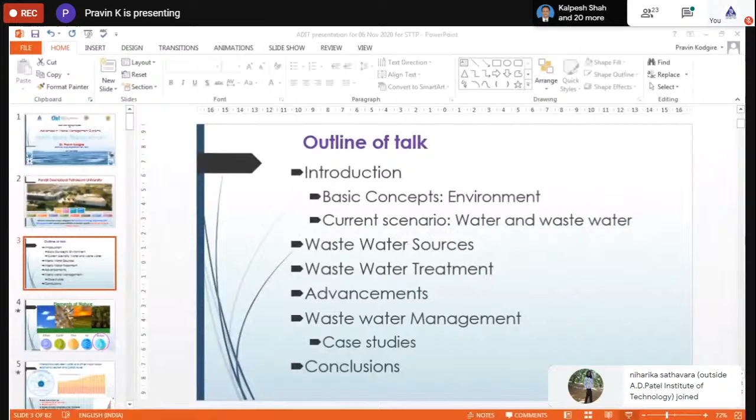Sorry to interrupt, sir, but your slide is not changing again. It's stuck on the outline of the talk. Okay, so let me put... Yes, now it's visible. I think I'll not put the full screen, I'll put it in this mode, because there is some problem. Or let me unshare and share it again. No issue, sir, it's fine, it's visible now. Okay.

So I was discussing the very beautiful nature and its five basic elements which we pursue through the scriptures: Akash, Vayu, Agni, Jal, and Prithvi. We are very familiar with these, and today we are going to discuss water and its importance through wastewater management. Why is wastewater management important today? Since childhood and ancient times we have known that water is a very important ingredient, and many habitats are situated where water bodies are available.

So let me take you to another perspective: water has a very strong interaction with human beings, human settlements, the ecosystem, and agriculture, producing food for human beings and animals, and producing energy. They are all interlinked, as you can see in the one circle where all these things are interrelated and all associated with water.

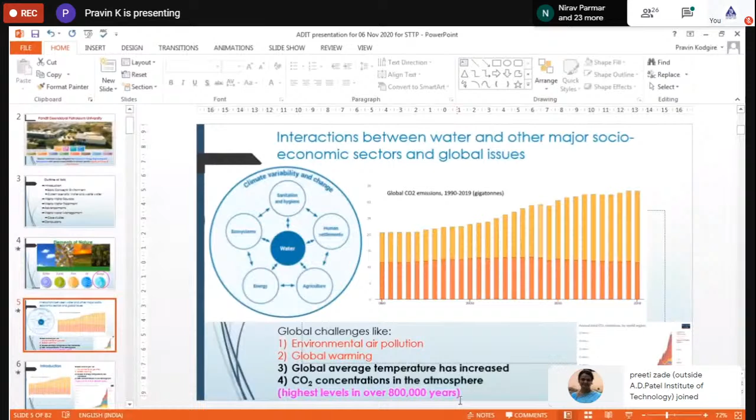This particular slide talks about global issues and problems, and how water is directly and indirectly related to some of these points. Before the pandemic, the CO2 level was the highest in 8 lakh years, almost about 420 ppm in the atmosphere, which is a consequence of environmental pollution and, to an extent, water pollution as well. Although water pollution in a different sense is our basic focus, global warming, the average rise in temperature, and CO2 concentration are certain challenges with which water is equally associated and going to get affected.

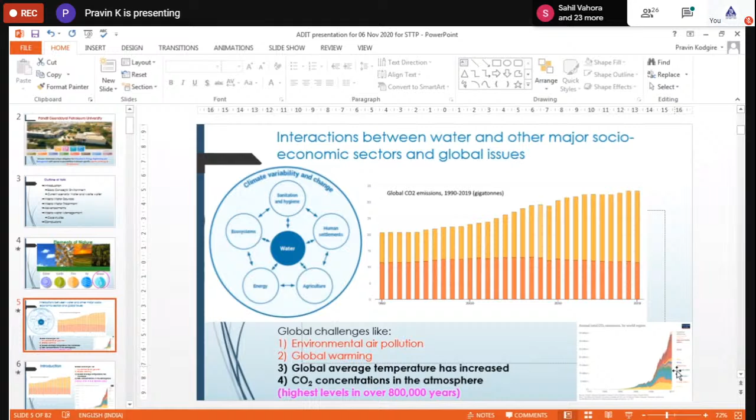Some other aspects, and at the bottom right corner you are seeing the country-wise data. Unfortunately I'm not able to make it full screen, so bear with me on that part.

When we talk about water, this scenario is very familiar to you all. Since our school days, we've seen this type of schematic that talks about the water cycle, how we get water. I'm not going to get into more details, just want to recap: we get water by evaporation, then condensation, cloud formation, and it falls on higher altitudes, then runs off into surface water, groundwater, and number of different sources like aquifers, lakes, oceans. What you see here are the different parts and components in terms of their quantities, showing the contribution of different areas - biological water, fresh water, their percentage in our ecosystem, deep ocean water, and their fractions. That is the major source.

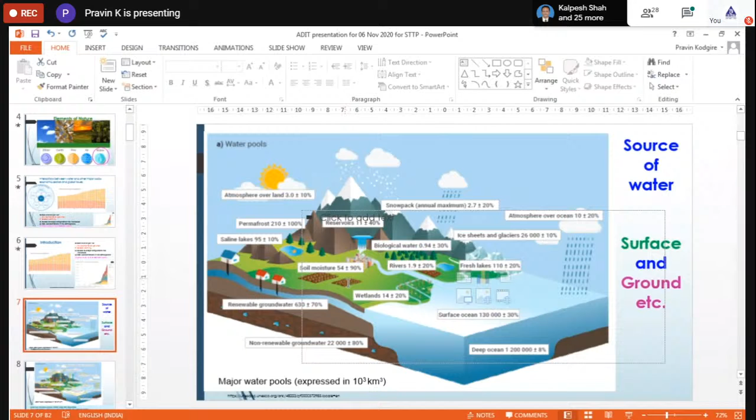We need to really look into this - when we talk about so much water being available, is that available for our consumption? This is a water flux diagram in terms of what gets into soil, crops, or is utilized by human beings for agriculture or irrigation. The blue arrows talk about the consumptive water by agriculture, industry, and domestic use, which is going to be a major part of our subsequent discussion.

And the grey water, which is a new concept - so far fresh water and wastewater were the concepts. These days, because of the enormous growth in population and their demands and requirements, a new type of waste is being generated, typically in urban areas, called grey water. This is mostly kitchen waste, bathroom waste, toilet waste, and all those things being taken into account. Here also you'll see certain numbers projected that talk about their quantum.

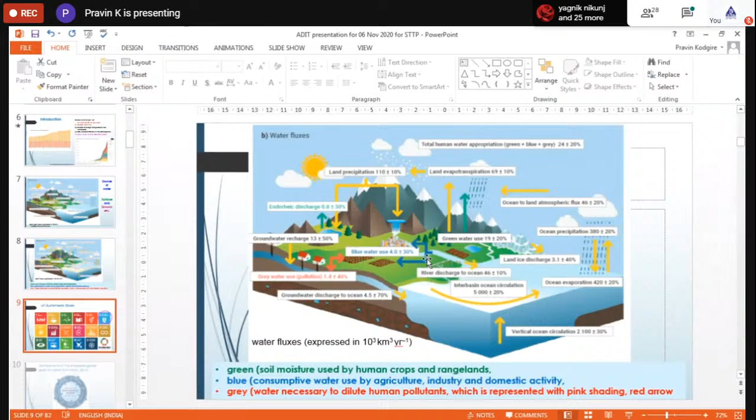The flux is expressed in terms of area, 10 to the power 3 kilometer cube, for that much region of the entire globe, and per that area, how much these different fractions of green, blue, and grey water are being utilized or produced. Some of that blue component is of more importance to us - those two blue arrows basically. Having seen the current crisis, which I already elaborated in the previous slides, these are all integrated - there is no exclusive thing where water has only an exclusive part and problem independent of other problems.

There are a number of problems, and typically in 2014, the world churned out certain thought processes at United Nations meetings and came up with sustainable development goals. Many of us, many youngsters, might have studied a course called environmental science - the need for introducing that was the same problems I cited previously. In citing these sustainable goal problems, there are 17 statements: no poverty, no hunger, good health, quality education, gender equality, food, good life, good water, and so on. This particular one with the pink circle is of more concern - with increasing population, industrialization, demands and usage, which I'd call whimsical usage of available water, water scarcity is happening. At the same time, water is getting consumed and converted into waste, and that is the reason of concern for today.

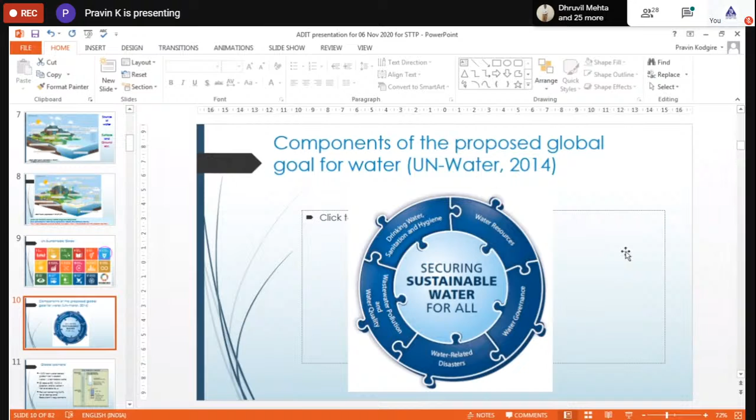But prior to that, just look at the availability of water. I spoke about the water cycle and how plenty of water is available. But we are all aware there is only 3% of fresh water available across the globe, which we consider as fresh or drinkable water. Just imagine, out of plenty of water, only 3%.

Another alarming thing is that out of this 3%, 2.5% of water is in the form of glaciers. This small fraction, the 2.5 or 3% fraction, in terms of cubic kilometers, is almost 350 lakh cubic kilometers of water quantum. Out of the entire globe's 3% fresh water, 67-70% is glaciers and groundwater. Of the remaining 0.5%, 30% is groundwater, and ice and permafrost accounts for 0.86%.

Just imagine and understand, that much is the only precious resource available to us for all human beings as well as the ecosystem. Apart from human beings, there are trees, creatures, animals, and all things that depend on it for their well-being.

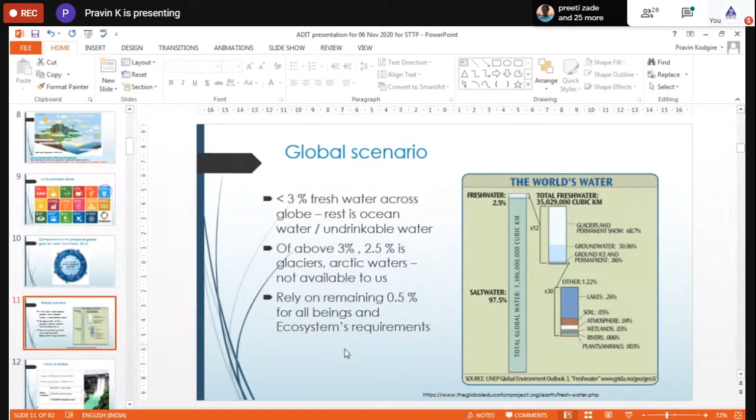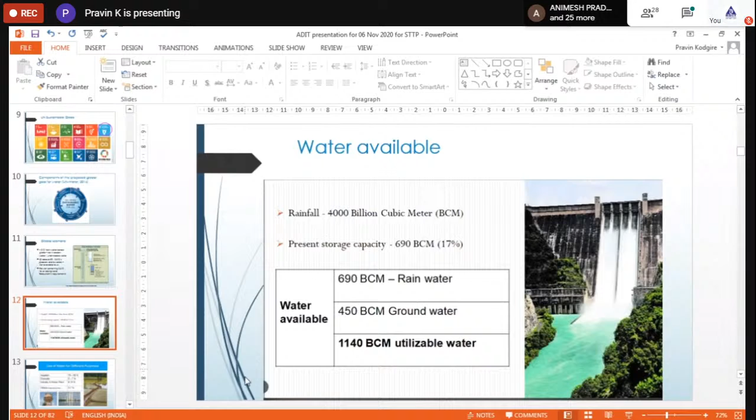To give some numbers: through rainfall and other ground sources available as surface water and underground water, this much billion cubic meters of water is available as such. But some is in stored form, some is in running form, and some is what we are basically utilizing.

As I said, most of the water goes into irrigation, and that is one of the big sectors when we talk about water management, or in terms of controlling waste management, which is an important sector we will discuss.

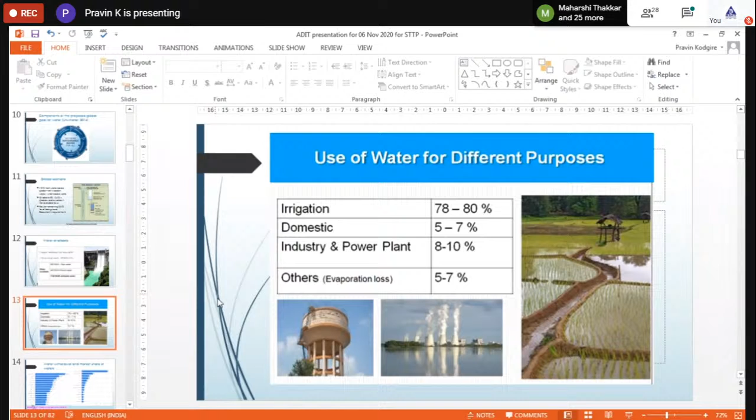At the same time, two other components are domestic and industrial power plants. Power plants are another important sector where water consumption is high, and these are the major sources for wastewater generation - that is, domestic and industrial activities. Irrigation and agriculture absorb a lot of water, which becomes energy sources through crops, or contributes to drinkable water. But domestic and industrial power plant sources are the major concerns.

This again gives you, the youngsters, a snapshot of the global scenario and the water component utilized by different sectors. I beg your pardon, because certain letters are very small and I'm probably not able to make it full screen.

Is it displayed as a full screen, sir, or is it displayed as a part of my PPT slides? It is displayed as a part of your slides, sir, not full screen. It is not full screen, am I right? Yes sir, yes sir. So let me try to make it clear. Now is it a little better, full screen?

No, sir, it is still not full screen, but it's fine, sir. We can see the trends.

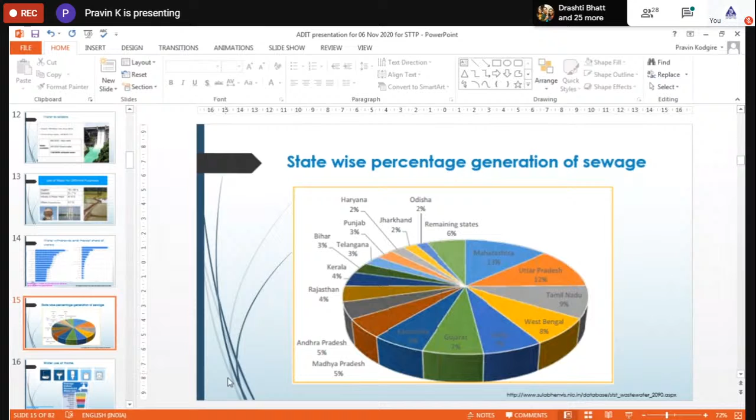Apart from domestic and industrial aspects, there are certain other things which I want to talk about.

On the domestic front, where we use water, that activity generates wastewater—maybe morning showering or brushing teeth, getting ourselves fresh or clean, bathroom, toilets, washing dishes after consuming food, and cleaning household materials.

Industrial activity we will look into later, and all these are again points of concern that need to be understood. This particular slide talks about water use efficiency.

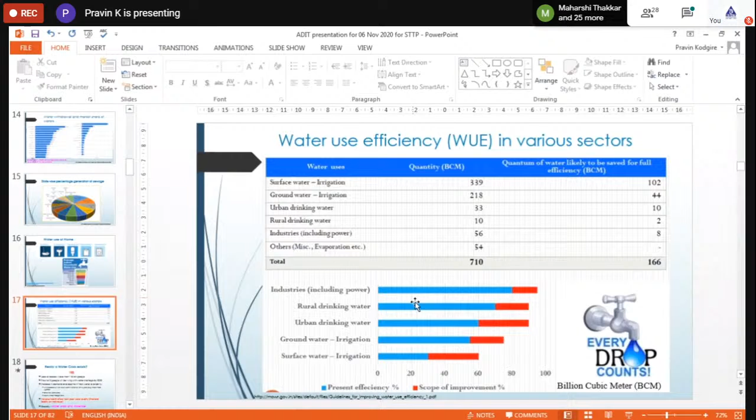Out of the total scope, there is an entire range of areas where we can implement management concepts, which we'll discuss later as part of further topics. This basically talks about water use efficiency, which is important to understand at this stage.

Moving ahead, I was talking about global problems and certain issues, all the different sources are available. The current situation, and I spoke about the United Nations sustainable goals for different aspects of life for betterment of society.

Is there really a water crisis available? Yes. Out of the total population of almost 730 crore, about 1 billion people, or almost 100 crore people, lack good access to water. Then two out of three people will be living with water shortage by 2025.

Forget about that, just a few days back I was reading one of the reports. It talks about geographical locations which have been identified as water scarce, and among that, acute water scarce. Some examples are cited in the same slide.

So there is increasing demand and a decline in fresh water. We are all aware that as part of global warming and climate change, the monsoon cycle has disrupted. In earlier slides I showed the water cycle under ideal conditions, but that ideal condition doesn't persist anymore. So the water obtained from natural sources is declining through rain or monsoon, and so forth.

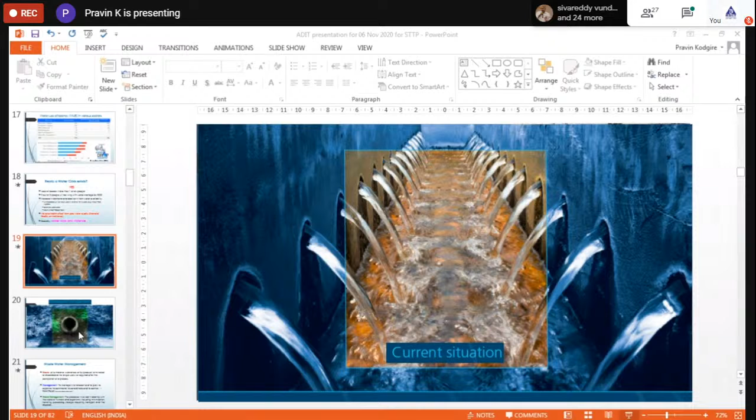Now, is it a full screen? No, sir, it is still not full screen. Not again full screen yet. No, not yet sir. Not again, because it is showing me full screen at my end, I don't know about your end. What about the other audience? Can they just chat and give the feedback, what more they are observing, whether they are observing? Yes, sir. No, the students or participants, are they observing part of the slides or the full screen? No sir, it's parts of slide, not full screen. Okay, just so that will be now a little better.

So this is what I was talking about, and I spoke about the current crisis and current scenarios, that acute water droughts are foreseen. Some regions are already getting droughts. The Chennai crisis, which I showed, or there will be a similar situation elsewhere which is being shown, or the water which is getting dirtier and that water is being utilized on a major scale. So there are plenty of complex problems which are basically integrated in this case.

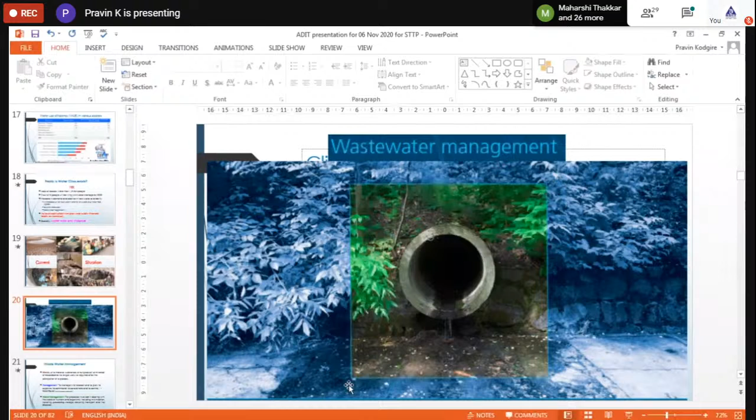And that is the reason we need to focus on an important aspect, that is wastewater management. Because as I said, we need to give importance to where the source of wastewater is coming from, that is the water, and we have seen so far the scope and importance of the different activities where water preserving and water maintenance is important. So let's look into three different aspects.

Waste, how it is basically defined: generally it is called any material or substance which is eliminated by different activities, may it be human or domestic activity. So material or substance or byproduct eliminated or discarded, which is of no longer use, that is generally called waste. What is management?

Management is to forecast and plan, to organize, to command, coordinate, or control the different activities. Just as I mentioned, foreseeing that population is going to increase, urbanization is going to happen, so I need to foresee and plan. My people require, my new industries require water requirement, and that utility or activity will generate wastewater. So I need to plan even for the wastewater activities and wastewater management plans.

So that's all, and wastewater basically talks about the process involved in dealing with the waste of humans and organisms, including its minimization, handling, processing, storage, recycling, transport, and finally disposal. That is what is basically wastewater management.

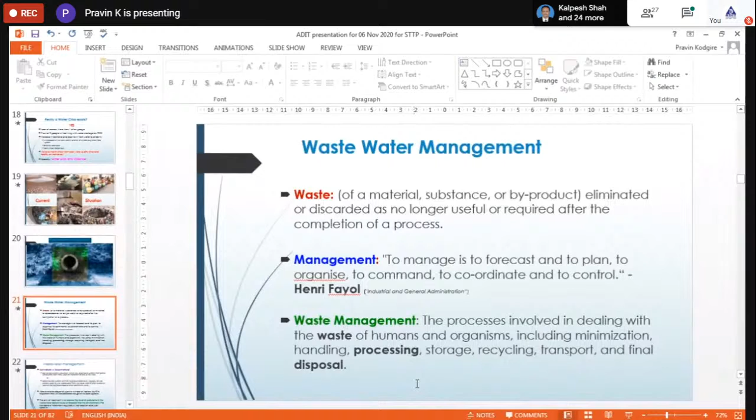When I say that, what I am trying to talk about here is it involves technical understanding of the activities and processes, at the same time the managerial concepts and managerial activities which need to be taken care of in order to control the problem. It involves minimization, handling, processing - how effectively I handle, how effectively I can store it, how effectively I can recycle back, so that the problems which are cited can either be minimized or eliminated from the system. So there are certain aspects that always come into play when we generate waste.

It can be centralized or decentralized. Centralized is generally the domestic activities, and decentralized is the on-site treatment, which is mostly the industrial activity or small-scale businesses and those things. So about choices, whether you have to centrally treat or decentralize and treat that water, anyway the management concept has to be brought into the picture.

With the problems which I cited, acute water crises and management, we need to be open to implement the treatment options, may it be centralized or decentralized. Ultimately, any treatment or management concept is to reduce the pollutant levels so that water, if it is to be discarded, will be easily discarded within the current statutory norms led by the government and statutory bodies,

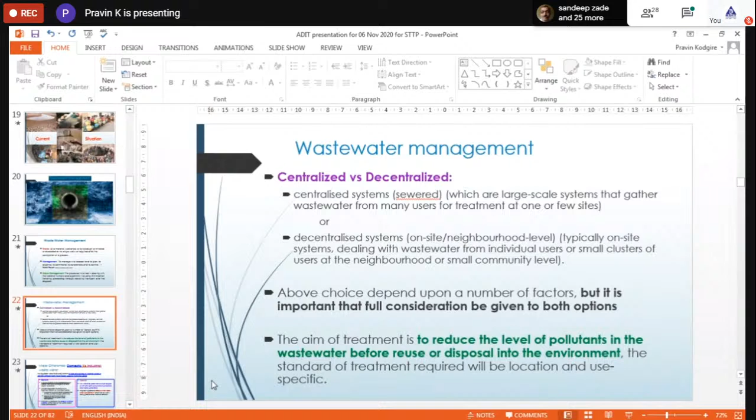or if it is to be utilized or reused, then it should be properly utilized, where the activities, may it be process, human consumption, or irrigation or agriculture activities, will not get hampered. That is the major objective of waste management.

Again, although I said centralized and decentralized, an important aspect to be understood is that the treatment and disposal of industrial wastewater is a bit different than domestic wastewater. In domestic wastewater treatment, the activities across geographical locations, urban or rural, are very common and very similar. So you focus on the analysis of other systems rather than only the waste streams under your consideration.

Since the activities are common, students and experts will agree that domestic STP treatment plants are very synchronized, the activities are very straightforward, and standard procedures are there. However, it is not the same with industry, and why?

There are several categories of industries, may it be mechanical, electrical, chemical, organic, pharma, paint, pigment, fertilizer, paper, you name it, where no two industries are the same. Within the same category, the industrial activities or focus of the industry is totally different. We'll discuss that in some examples in subsequent slides. So this important aspect one has to understand.

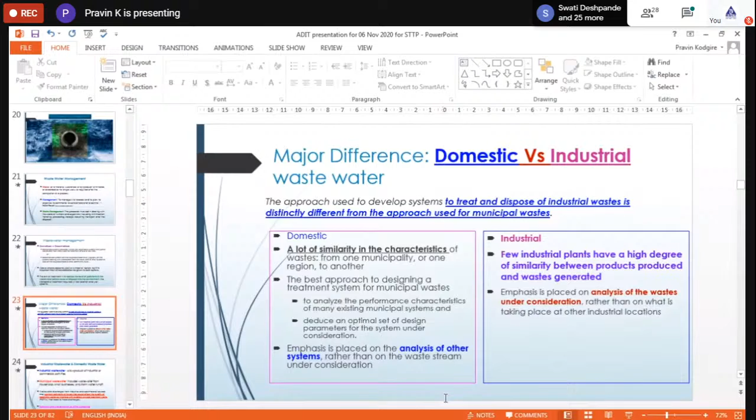Ultimately, both aspects need to be focused, but there is one finer difference that youngsters need to understand. Industrial water is a byproduct of industrial activity. Municipal is mostly household activities and small businesses, which we discussed previously. In both, the technical and engineering components as well as the management component are essential.

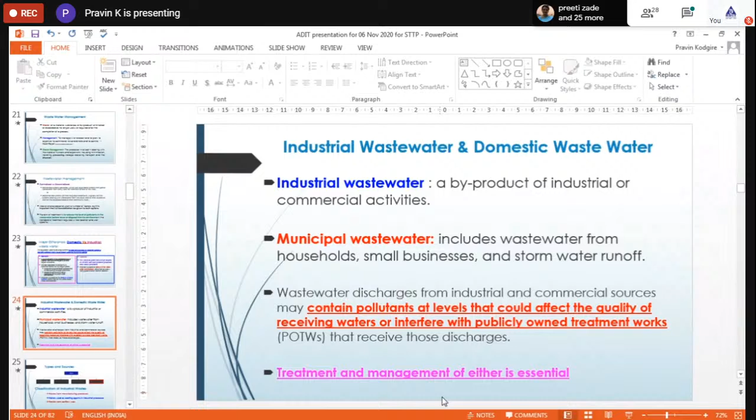There was a kind of animation here and probably I'm not able to show it to you, so I need to get rid of some of the animations which I put.

Generally, when we talk about waste sources and types, there are four broad waste types, and we are focusing on industrial and municipal waste. Domestic waste, as we have seen, is generated by household activities: washing, draining, bathroom waste, and so on. Industrial waste comes from manufacturing activities as well as utility waste,

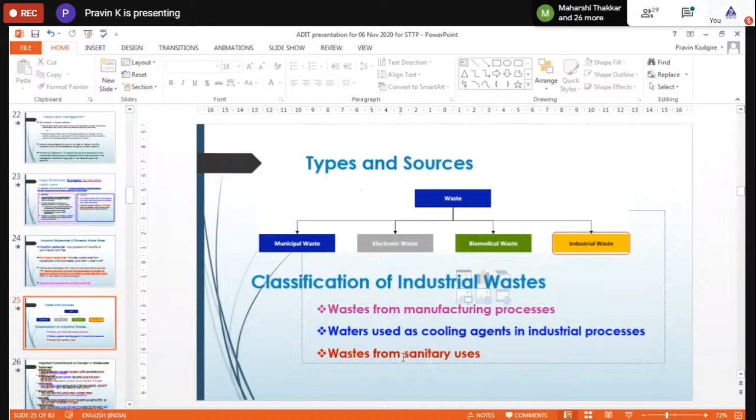mostly the cooling water, the steam generated, or the cold water discarded after utilization, as well as waste generated by sanitary uses across industries: kitchen activities, bathrooms, toilets. That fraction is generally very small, but these are the broad classifications of industrial waste.

Now we need a quick glimpse, which many of you are aware of, but I want to highlight these because that is where engineering and technological insight is needed, and much research is going on in those areas. Suspended solids need to be taken care of. They create sludge deposition, and anaerobic conditions create a problem for waste treatment as well as the aquatic environment.

Nutrients, because a lot of different products, maybe from industrial activities or the household products which we are consuming, ultimately contain phosphorus, nitrogen, and carbon-based elements. I'm talking about their complex nature. Later on, they will create a problem for their easy removal from the waste resources, and that's how they will

create a problem. Another problem which these nutrients will create is the formation of undesirable aquatic life. That is, they will create algae formation or deposition at the bottom, and they are not easily disintegrated. Other priority pollutants like organic and inorganic components are typically carcinogenic or toxic in nature. If they are present in the wastewater, that will create another big problem.

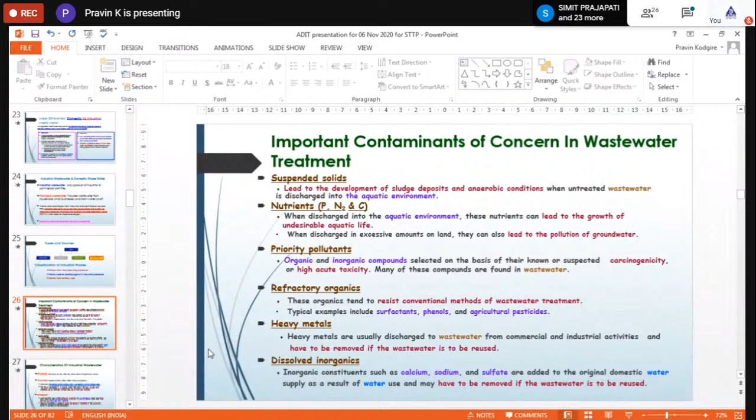So when we again talk about industrial wastewater, these are some important and very known facts, but I would like to quickly run through these things. The wastewater obtained will have physical characteristics, chemical characteristics, and biological characteristics. When we talk about the technological or engineering aspect, some of these parameters will be important, which we'll discuss in the subsequent slide.

So when we talk about physical parameters or physical properties: total solids, odor, color, temperature, turbidity, because from an end usage point of view, some of these physical properties are important, especially color and turbidity in terms of the aesthetics of water. This is useful whether it is fresh water or retreated water to be used for other applications. From that aesthetic point of view, these physical parameters are very important.

Chemical parameters are mostly organic matter, that is fat, oil, grease, or volatile organic components, or some of the refractory pollutants, like phenol and surfactants. These are the chemical characteristics present in the wastewater. And based on that, there are two important parameters which essentially have to be defined for any waste, whether it is domestic or industrial waste. That is biochemical oxygen demand and chemical oxygen demand.

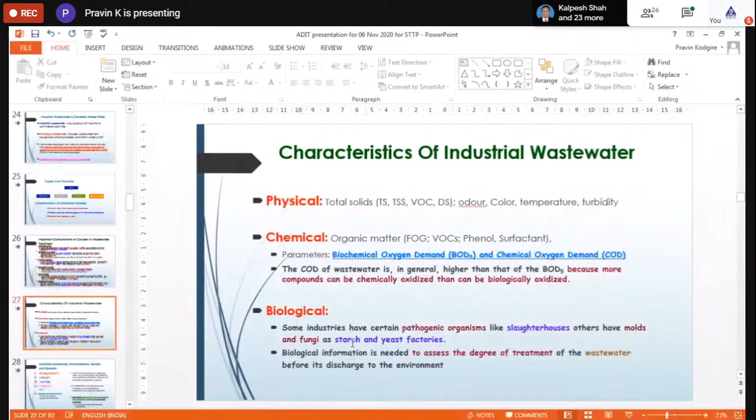So they need to be taken care of, and there are certain advanced techniques which we'll discuss later as a quick review. They need to be removed. So these three basic parameters need to be taken care of. As I said, when you talk about industrial water, these important parameters need to be taken care of.

Biodegradability, where I talked about BOD and COD: how much quantity of this BOD and COD is there in terms of their numbers, how much volume, that is in terms of meter cube, in terms of liters, and so on and so forth. That is very essential.

How much is the variation, because when you talk about domestic as well as industrial activity, there are three different parameters: one is the minimum, one is the average, and there is a maximum. Under which circumstances is there a minimum load of waste generation, under which load is there maximum waste generation, whether your activities are continuous or interrupted, like semi-continuous or batch processes, whether they occur frequently or over large durations of time.

So these are the different aspects that need to be considered in order to take care of the quality and quantity of the wastewater. That is where the wastewater needs to be characterized. And out of that, two parameters, BOD and COD, are of great importance. The difference between COD and BOD values provides an indication of the quality in a relative sense, that is, whether it can be degraded easily by microorganisms alone, or whether you need to use different chemical oxidants in order to treat the water.

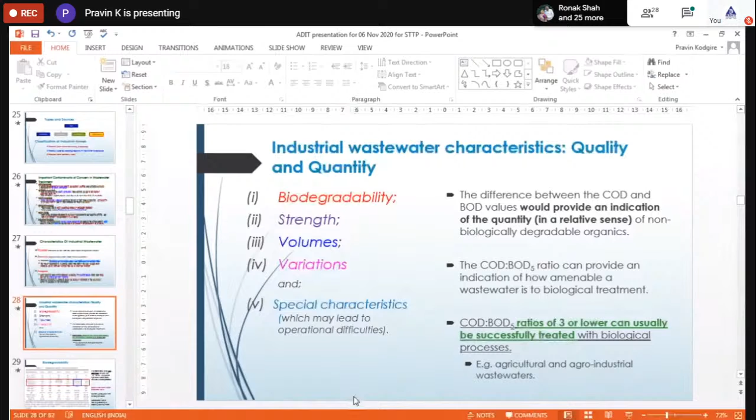They need to be analyzed, and many of you are aware of waste treatment activities. Three times daily these different parameters are evaluated, and based on that certain activities are controlled or managed dynamically. So ETP operations are basically dynamic. They are not straightforward, that you set certain parameters, go to sleep, and the work gets done. No, it is not like that. There are some industries of great concern where the COD to BOD ratio is very high, which we'll discuss. So that's the first parameter, to give a glimpse.

Now, within similar industries, the water generated as waste is not of the same quality or from the same activity. Here there are 6 different cases of different categories. I'll not get into too many details, but these are slaughterhouses, and the product obtained goes to different activities, and based on that different parameters are mentioned: flow rate, COD and BOD values, total suspended solids, oil and grease, total Kjeldahl nitrogen content, and ammoniacal nitrogen.

Different parameters are there. What we have to focus on as part of biodegradability is the 5 cases: case 1, 2, 3, 4, and 6. If you see, the COD to BOD ratio is less than 3. So as a thumb rule or technical understanding, these types of waste can be easily treated by biological treatment processes. However, case 5 is not normal like the 5 other cases. Why? Because in case 5 the COD to BOD ratio is more than 3. It is 3.3 to 4.

This particular water comes from activities which may contain traces of blood, and that's how the water gets complex. It cannot be easily broken down by the normal methods we use for the other 5 cases. So some additional waste management concepts need to be incorporated so that the water can be easily treated. I'm just emphasizing the importance of focusing on the characteristics of wastewater.

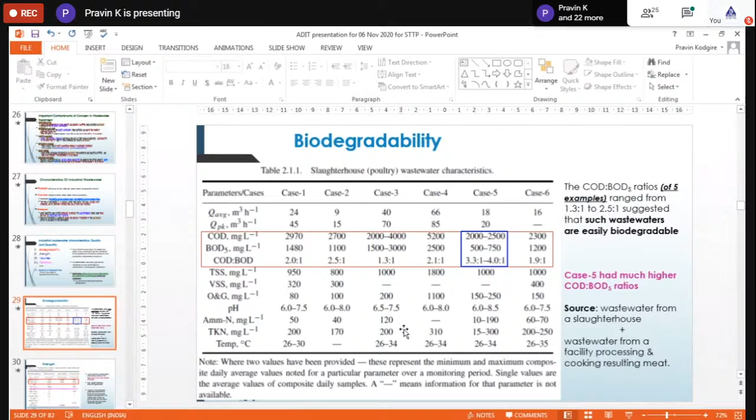The next example is strength. If you talk about different industries, let's say the food or organic industries, sugar or food-based industries or agro industries, such as starch extraction, sugar milling, or coconut cream, you see the BOD to COD varies drastically, and that's where the strength keeps varying, which I talked about with domestic water variation, the difference between domestic waste and industrial waste. So this also needs to be taken care of, and that characterization is important.

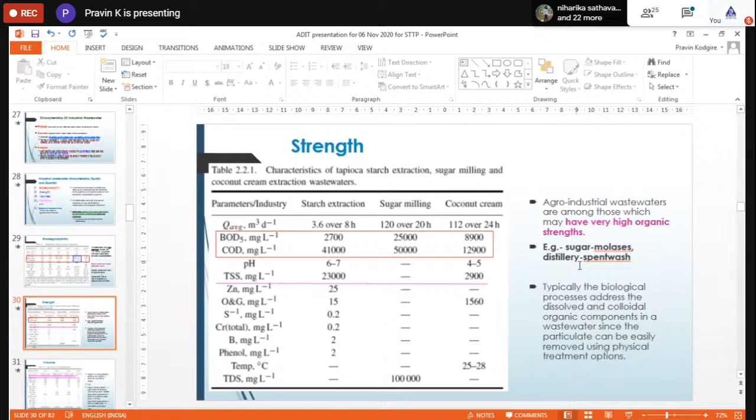Another parameter is the volume. Now this is a particular paper industry, which is considered to be the largest or major industry where plenty of water is used. Just imagine, almost 28,000 meter cube of water is required on average basis. I'm talking about the first case. And if it is the maximum production taking place, almost 36,000 meter cube of water per day is required. Just imagine how many domestic supply water tanks are basically required in the paper and pulp industries.

So that's how you need to be aware, and these are all the parameters I'm focusing on and talking about. Based on that, on-site ETP plants need to be designed - the volume, the treatment, the sizing of the equipment - and based on that, the different raw materials required for the different stages of the treatment is to be focused.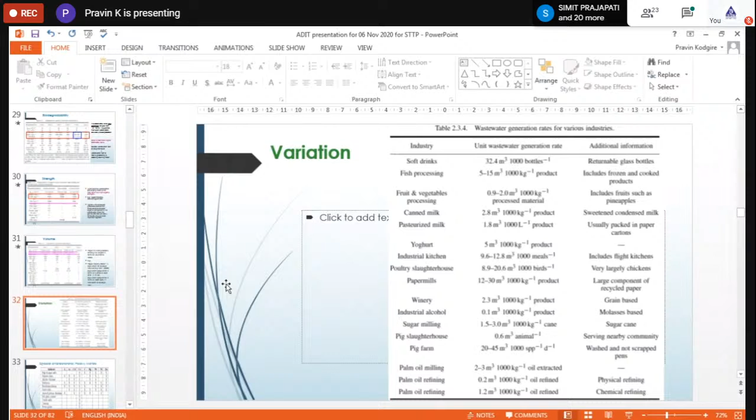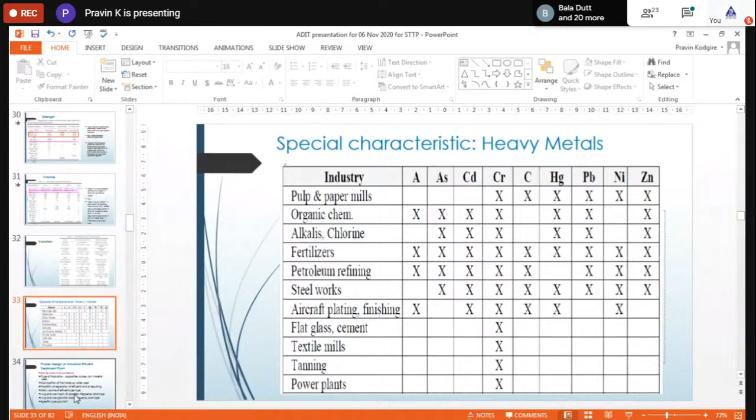And what waste is generated - you have to be sure that these will be available in the waste to be treated, and accordingly a suitable thought process has to go into designing of the waste treatment plants and waste treatment management systems. So as I said earlier, I mentioned the production type, capacity, composition, makeup based on the physical and chemical characteristics - BOD, COD, TSS, so on and so forth.

Whether the effluents can be segregated or not, that needs to be understood as part of the treatment. The daily volume type - that's where the minimum, maximum, and average quantity on an hourly or daily basis needs to be established. All these different statistics have to be available before planning or proper designing of the effluent treatment plant.

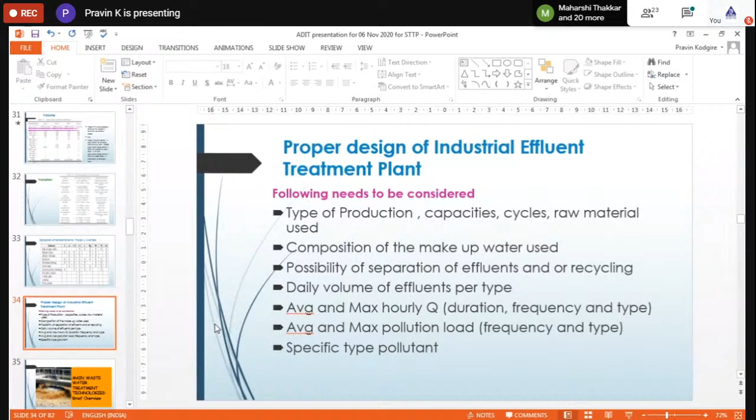Now, having this broad and brief idea, let's try to have a brief overview. Okay, we have done all the activities and you have generated the waste - what do I need to be doing to take care of the waste? Now this is something I am just putting for the students who don't have any idea of what is involved when we talk about wastewater treatment plants.

So this gives a very brief and overall snapshot of what happens in any typical wastewater treatment plant. You get the waste, and first is the preliminary treatment. Then that waste goes for the primary treatment, then it goes for the secondary treatment, and then it goes for the tertiary treatment. These are the major stages in the waste treatment plant.

So first is the removal of the bulk waste in terms of sticks, bags, rags, toilet paper, or tampons, and so on, which are easily observed to the eyes. That is done in the first stage, which is the pre-treatment or part of primary treatment.

Then there are bars and screens, because this water comes running through the lines and sometimes pipes, and different clay, silt, or solid materials ranging from a few centimeters to a few millimeters in scale are removed. Otherwise, if they are taken directly to the actual treatment, they will create a problem.

And that is where the grit chambers and sedimentation tanks, as part of primary treatment - these processes are there, where centimeter to millimeter scale, and then millimeter to few micron scale particles are settled.

When we do so, it takes care of 95% of total suspended solids, whether organic or inorganic in nature. And then come the dissolved inorganic or organic substances which we are not able to take care of at the primary treatment stage - these are taken care of where I spoke about the biological oxygen demand, chemical oxygen demand, and total suspended solid estimation of this particular thing.

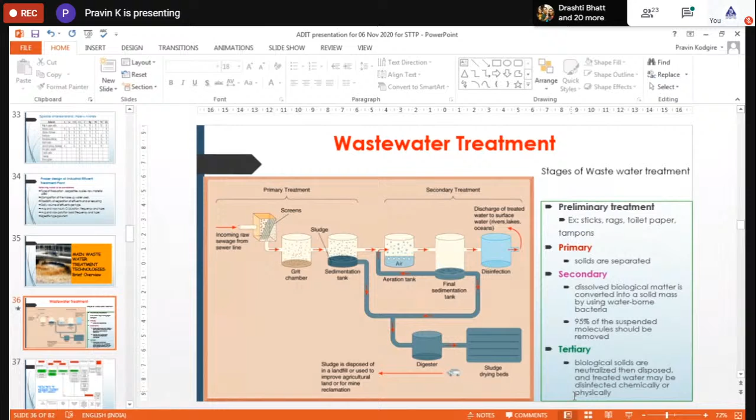So that is where tertiary treatment comes into picture, and you need to have a thorough analysis of the treatment characteristics, basically the characteristic of the waste. This again gives a little more elaborative aspect.

Preliminary treatment talks about screening and grinding, and these are basically the easy steps. What's involved is equalization and oil separation.

Then when we talk about primary treatment, there are two types of activities. One is chemical in nature, where chemical modification or treatment is done using different chemicals, or by using physical parameters—not changing the phase, but by sedimentation or filtration. In chemical methods, neutralization, coagulation and flocculation use flocculants or neutralizing agents, maybe acids or bases, to take care of the pollutants. In physical methods, whatever chemical treatment has been done, or if the mass has heavy weight, it can easily settle into the sedimentation tank, or whatever floc is obtained can be separated. Then the water comes to the secondary treatment.

Now, some of the arrows are not given in the first two treatments. They will just create some solid sludge which needs to be directly discarded. But from the physical treatment, that is flotation or sedimentation, they create a sludge which is taken at the centralized stage. This primary treated water then goes to the secondary treatment.

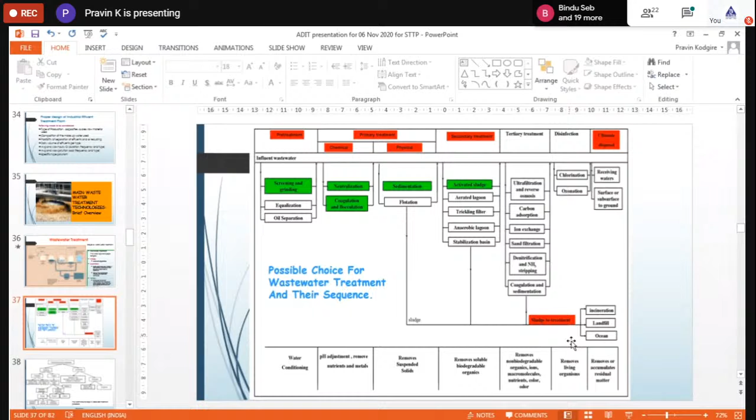What at each stage is taken care of when you talk about the holistic view of wastewater - here is an advanced wastewater treatment plant schematic. Depending on the industry, some of these aspects are taken into account and some are skipped from the process. Later on, the sludge which is obtained - these days there is a thorough talk going on about waste to wealth. Nothing is called waste as such. From the waste or sludge you can extract valuable ingredients, which will add value to your organization and make your system profitable and sustainable. So these overall aspects as technical components are important.

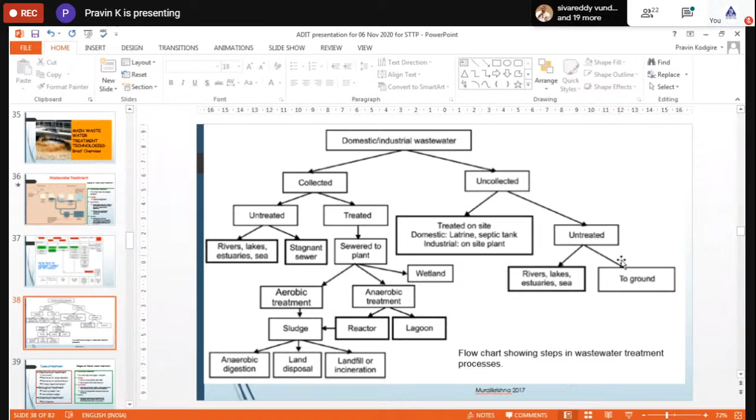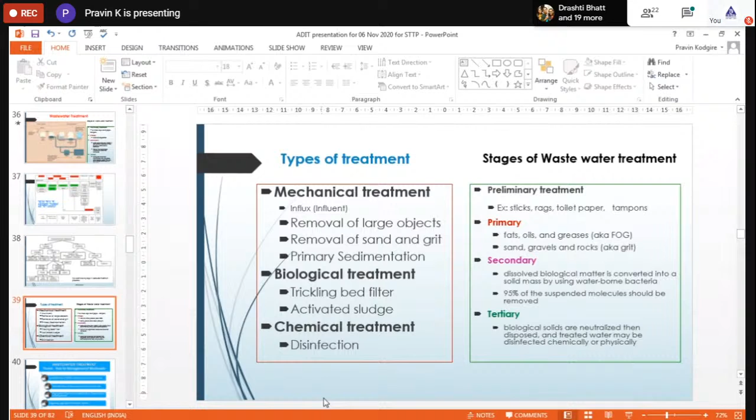These aspects need to be properly understood, and that is where industrial wastewater management comes into picture. More or less we have already discussed these aspects - just a few new concepts. There are certain operations - primary, preliminary, secondary, or tertiary - classified into types of treatment. Some are mechanical treatment, some are biological treatment, and some are chemical treatments. This distinction is general information that needs to be well understood. With this understanding of what type of treatment goes into the system, and the thumb rules and parameters we discussed earlier, there is an acute need to look at waste management concepts and treatments, which we'll discuss in the subsequent slides.

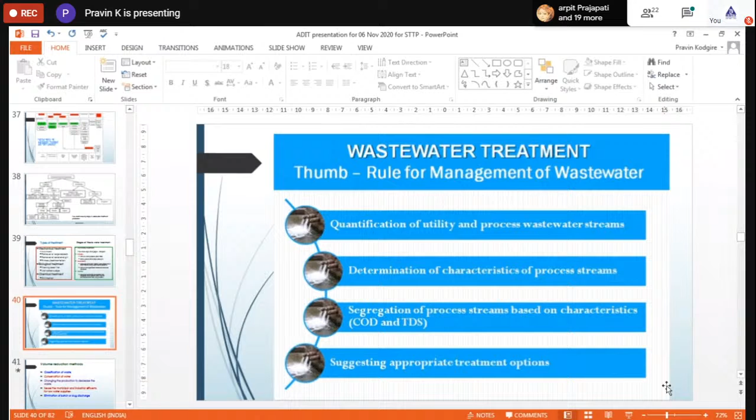So quantification - as I mentioned, we have to do parameter estimation and determination of characteristics of the process streams: BOD, COD, TDS, TSS, and so on. At the beginning itself, identify whether the streams can be mixed or diluted. These concepts have to be taken care of, and for that there are certain thumb rules or parameters used in industry - that is volume reduction. Just recall the parameters: biodegradability, strength, variation, volume. These are certain practices industries are adopting.

Now, these can be called technological concepts where technology is involved, as well as managerial concepts - applying common sense and common logic to work out a smart way. So classification of waste, depending on the industry type, is the first step. Try to go for water conservation mechanisms wherever possible, and change production to decrease waste. We'll discuss some of these aspects in subsequent slides, along with a new concept - centralized and decentralized approaches. There are certain regions identified as water crisis regions, where generally municipal or industrial waste is not utilized. But the days are not far ahead when we need to think judiciously about treating both industrial and municipal waste to reuse for domestic application - meaning for drinking water purposes. Today there are technological advancements, and you will not make out any difference.

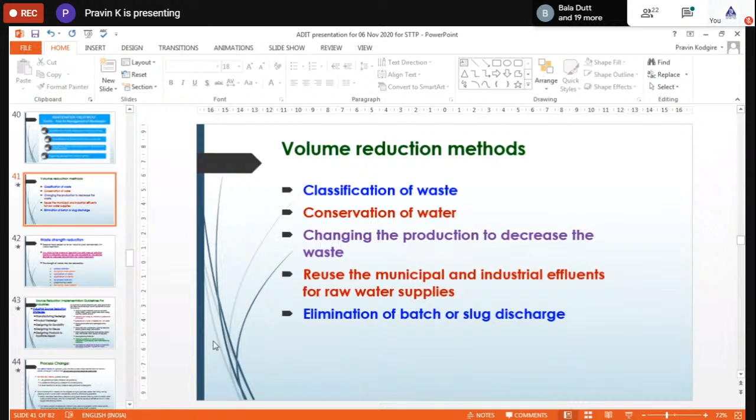Volume is the quantity, strength means the concentration, and all of these things at the source itself - at the very first point where I'm making anything - what raw material I have to take, I have to use it judiciously, not whimsically. So from that point of view, some redesigning of the product, facilities, durability design, and reuse concepts come into play.

Some important parameters, if you take care of reuse - I have just put it here - reduce the plant scrap by increasing production efficiency. The equipment you use, in subsequent slides some other examples will give a more idea, as well as recover plant materials such as solvents, scrap metals, plastics, paper, and so on and so forth. Don't consider it as waste.

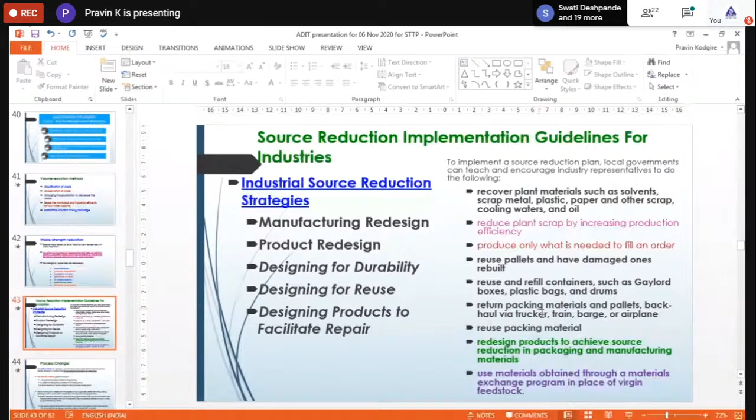Try to build wealth from that waste. Return the packing materials, pallets, and all these things. This doesn't directly relate to wastewater, but if you adopt these practices of reuse and recycle, that will substantially reduce the load on the waste generated, and easy treatment can be done and easy waste management can be done basically.

So just to quickly look at process changes - one of the important industries, the leather industry, produces very toxic wastewater, and there are several stages which generate the waste. So some simple solutions.

Earlier, people used to use lime and sulfides to get rid of the skin from the dead animals, and then they used certain treatments for the removal of traces of proteins and blood, and chrome was used to etch out certain surfaces and so on.

So with the betterment and involvement of science and technology, people have come up with different chemicals which are less harmful and easily decomposed, as well as enzymes which give the best application for waste treatment.

Another example is the iron and steel industries. Earlier, a lot of water was used for quenching - the large processed ingots or large processed steel need to be brought down to a lower temperature. So people are now using CO2 as a dry gas, or dry quenching is done.

So you are getting rid of the water which was either used or discarded in terms of steam, which was supposed to be condensed, which is difficult in large quantities. But those things are now being adopted as dry quenching.

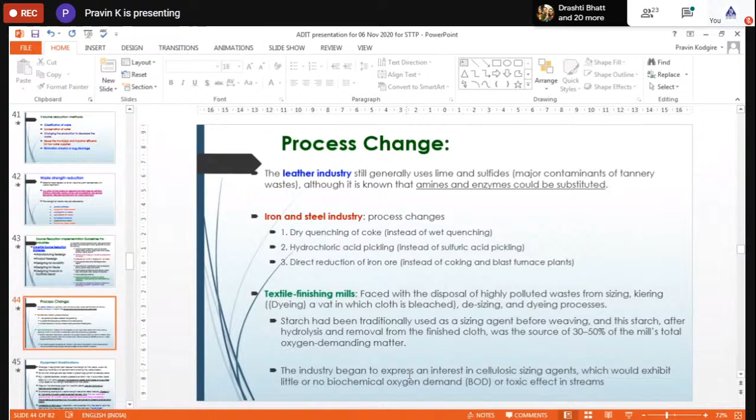That's where the process - equipment modification - I'll just quickly give some examples of the food industry and some other industries, that is the pickle industries. Now these are very small and common sense aspects basically.

If you put screens on the drainage, most of the food particles and ingredients which are otherwise just discarded into the drainage line—loading your wastewater strength, concentration and volume—can be taken care of and discarded at the source itself. In poultry industries or leather industries, you try to remove the feathers and other pieces of fat at the inlet stage, at the source itself.

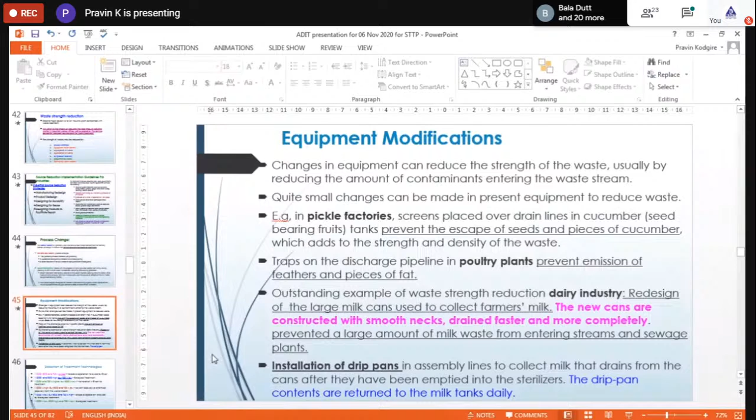In the dairy industries, they have designed new types of cans with proper neck sizes, so the drainage of water after washing the cans can be easily done. That drained water contains a lot of organic fat, oil and grease. These were also collected as part of drip pan systems installed in most industries, like Amul or Madur. If you visit, they are adopting these waste management practices, helping them collect valuable resources at the source itself and bringing less load onto the treatment level.

More or less, there are certain thumb rules. What are the design aspects we discussed? Primary, secondary, tertiary treatments we have discussed. Depending on the COD, BOD and TDS level, they will decide. If you have that very well understanding, then you can very well talk about what approach to take.

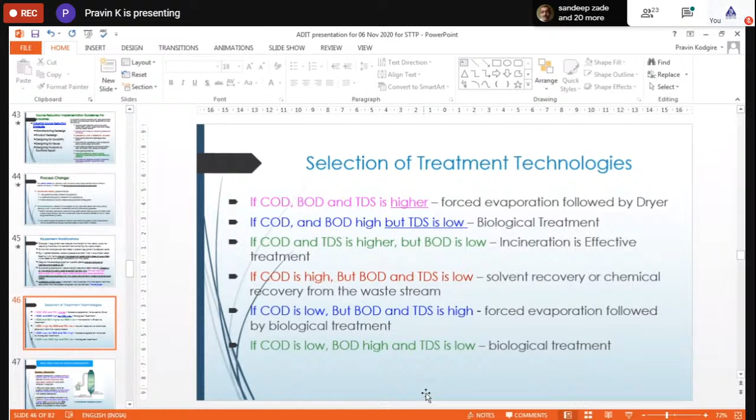You don't have to do the engineering or discovering on your own—just consult the experts, and you will find the solution for waste management.

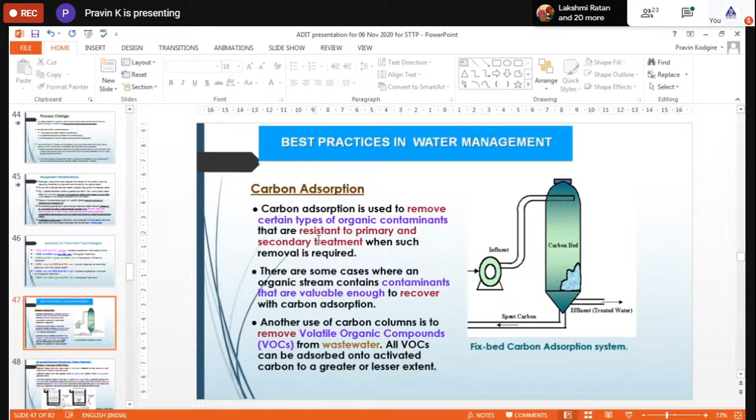Now we'll quickly look at some snapshots of treatments which were not easily accepted as norms for conventional plants, but are the norms from an advanced treatment point of view. Carbon adsorption is one of the best waste management practices, taking care of removal of certain organic contaminants that cannot be treated in primary and secondary treatment. After secondary treatment, you take the treated water to this carbon adsorption process. It takes care of volatile organic matter, removes phenolic or refractory-based chemicals and similar compounds, and after that you can reuse the water or discard it into the mainstream.

Another important process is filtration—a treatment adopted for removal of both organic and inorganic suspended solids which cannot be easily treated by primary and secondary treatments. These can be easily taken care of, and the water obtained is very well utilized, reducing the load on the system.

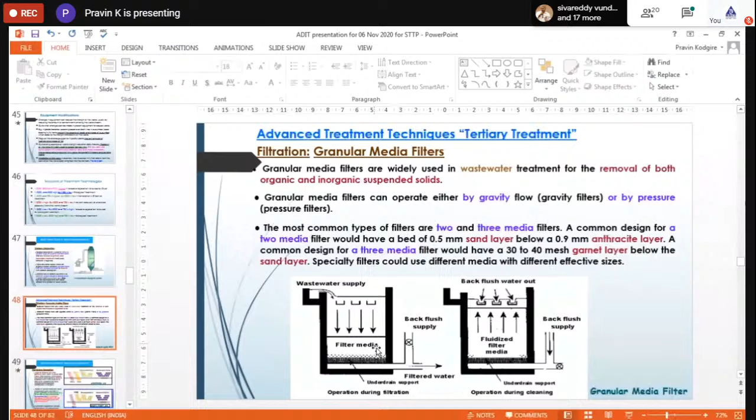The waste that is recovered can give you valuable ingredients if there are mineral deposits in terms of phosphorus and nitrogen. If you then take that sludge to tertiary treatment or multiple evaporators, you will get valuable elemental pure phosphorus, nitrogen, or other ingredients which would otherwise just be discarded—these are valuable fertilizer ingredients that can be easily value-added to your systems and industries.

As I already mentioned, membrane-based technologies further remove dissolved solids where the particle size is less than a micron, close to atomic levels, so those dissolved salts are discarded. Again, there are certain parameters—if you have to use water for boiler applications, the TDS has to be nil, as close to zero as possible.

So if you have to use your treated wastewater directly in your plant, there is a certain concept I'll discuss later on, that is zero liquid discharge. So from that perspective, these membrane technologies are playing as a wild card for most of the industries. If the industries are not using them, they are supposed to use different membrane-based techniques, maybe ultrafiltration, maybe reverse osmosis, but reverse osmosis is the most opted option to take care of the suspended or dissolved, very fine

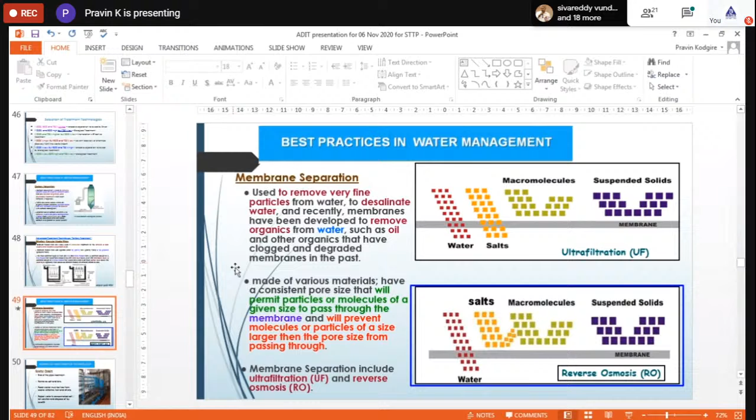dissolved organic matters. Even that is utilized by Saudi Arabia and other nations for removal of the salt, desalination. And as you all know, Saudi Arabia is a country which doesn't have any fresh water. They rely on the saline water obtained from the seashore, the Red Sea or the Middle East sea, which is available in their countryside, and most drinkable water they obtain by doing this membrane reverse osmosis process.

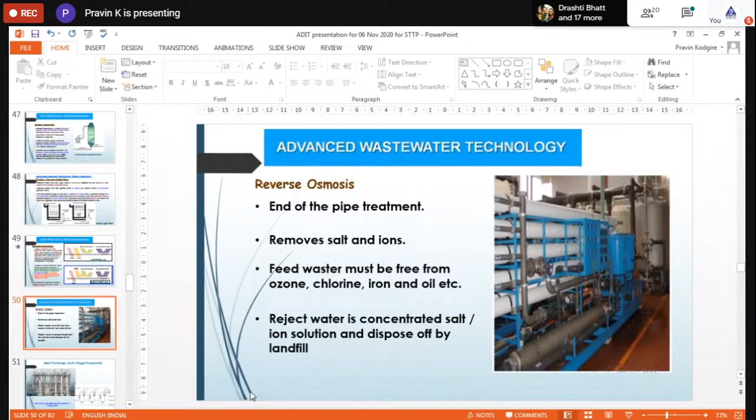So it is considered as an end-of-pipe treatment, but this plays a very important role in wastewater minimization, because if you make that water as good as the pure water which you are getting from the rivers and canals, you don't have to depend on the fresh water requirement. And if you are not depending on fresh water, that water will be available for other activities or for needy people. Only what you require will be the makeup water, and that's how you can become self-reliant as a part of the waste management concept.

Another is a multi-effect evaporator. These are all things I'm talking about after secondary treatment. The wastewater is there. These days people are putting it to the multi-effect evaporator. Water is evaporated and then condensed. You are getting pure water. That water you reuse in your system. And the metals or solids or valuable ingredients which are left out are generally identified as rich in nitrogen and phosphorus, which I already told you are valuable raw materials for the fertilizer industries, or they can be directly used in the agricultural fields.

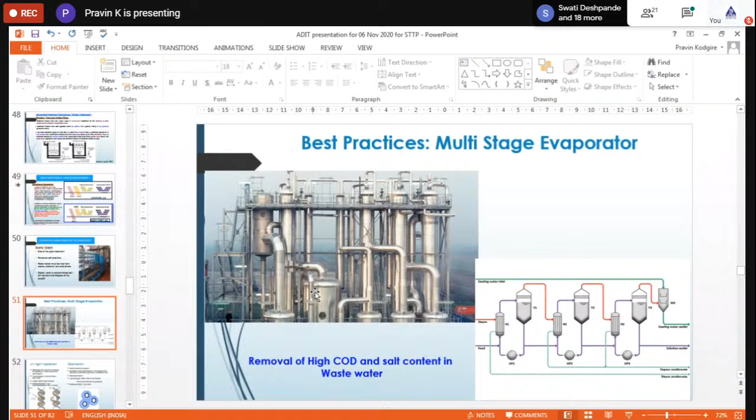So this is a very important aspect, that is zero liquid discharge. What it involves is, once you get the water in your system as a first input, whatever waste is generated, no waste should go from your system back to the environment or the atmosphere for treatment or discarding purposes. Every single drop of water which is taken as an input should be consumed, utilized, and whatever waste is generated should be treated, and no additional water is required.

Why is it needed? There are stringent regulatory norms put into the system, maybe CPCB or GPCB, as well as an environmental need, and as I already mentioned, the fresh water we are getting today does not have good enough characteristics and quality. It is increasing the load in terms of water treatment and subsequently wastewater treatment, as well as the financial and economic burden. So to take care of that, there is this ZLD concept: no wastewater disposal, waste recovery for utilization, as well as value recovery and valuable salt recovery.

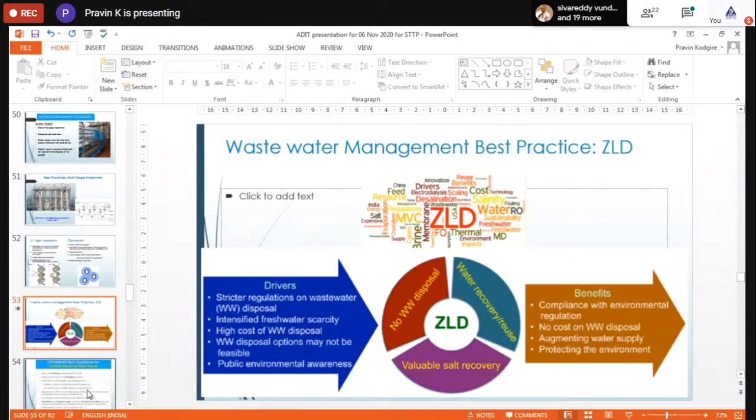So by adopting ZLD you are complying with environmental regulations. There is no cost for wastewater disposal. You are no longer depending on natural resources for your freshwater requirement, and you are protecting the environment. You are doing the best social service. And as I said, there are certain industrial norms; even the Ministry of Environment and Forests and CPCB gazettes are making it mandatory for industries to adopt ZLD.

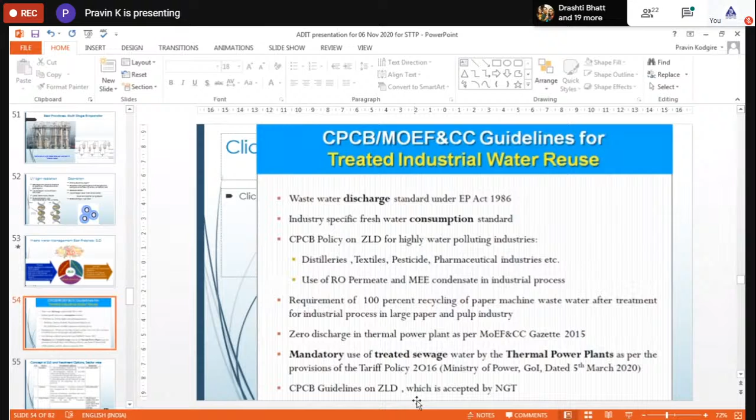So if you recall Dahej, a lot of special economic zones are coming up across Gujarat, typically in Dahej. Most of the industries are now adopting ZLD options for their industrial plant design. And as I said, CPCB guidelines say that ZLD is the norm, and the National Green Tribunal is also emphasizing this. This just shows, whether it's a distillery or tannery, how you can design your ETP plant, for example, distillery biomethanation followed by reverse osmosis or multi-effect evaporator followed by incineration.

Then if you take care, you are achieving a ZLD approach for your industry. Likewise, biomethanation followed by RO, multi-effect evaporator and biocomposting. Still, you are adopting it as a ZLD approach. As I said, some of these aspects were not affordable or aware. A lot of awareness needs to be done, typically for the small scale and medium scale industries. Large scale industries can easily adopt certain of these aspects.

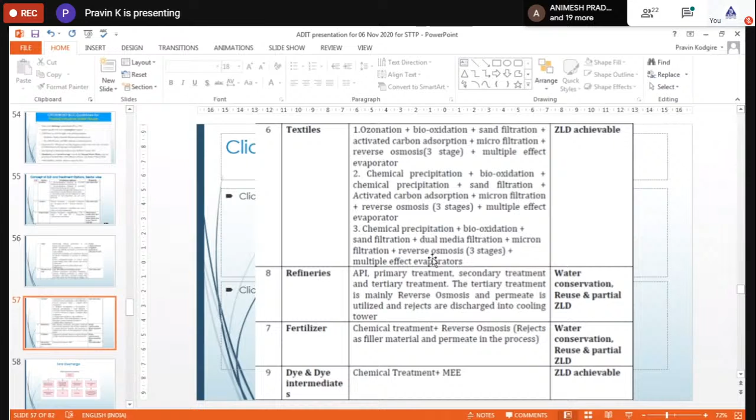So likewise, these documents are available on the CPCB website for the different ZLD concepts which are to be adopted for tannery, paper and pulp, sugar industry, pharma industry, as well as textile or refineries or fertilizer, name it, any kind of industry, and we have all those industries in Gujarat. So ZLD is one of the important ingredients. I'll skip some of the slides due to the paucity of time which is available.

So these are some important industrial advanced treatment techniques as a part of waste management technique. So I'll take some quick examples of case studies where some advanced techniques or some of the concepts of waste management are being brought into practice.

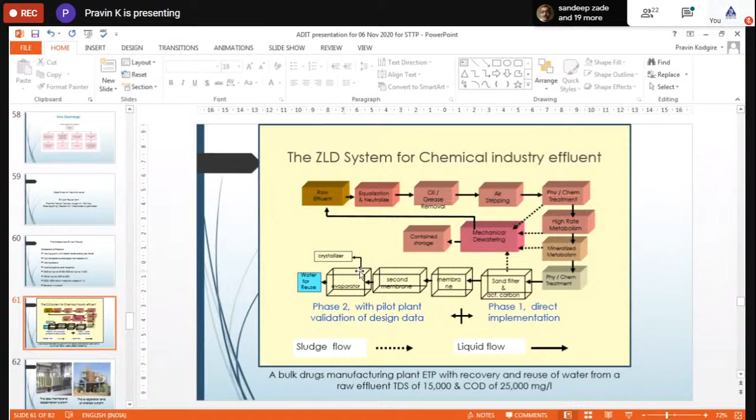So they adopted the ZLD concept in their premises. I'll not get much time to explain each and every stage, but this is a typical schematic of that particular industry which has adopted ZLD. So these dotted arrows and dark, continuous arrows talk about the interconnection of the waste streams and the wastewater streams in the plant, and they have adopted RO systems as a part of the ZLD,

and I'll just show you what type of ZLD concept they introduced which was not in their plant. That is a disc membrane desalination system they adopted. So they are taking care of the total dissolved solids, followed by evaporators and crystallization systems installed into the system. And as a result, they are complying with the ZLD concept for their pharma industry.

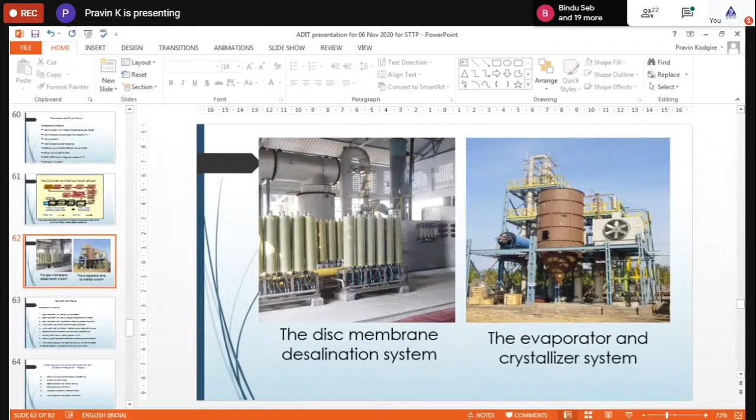Another example case study is textile effluent. So what characteristics? It is a dye with high TDS, maybe 50,000 ppm, varying colors, pH between 4 to 5, and volume is very high. So these were the different challenges faced by this industry. What waste management concepts they have adopted, I'll just take you through.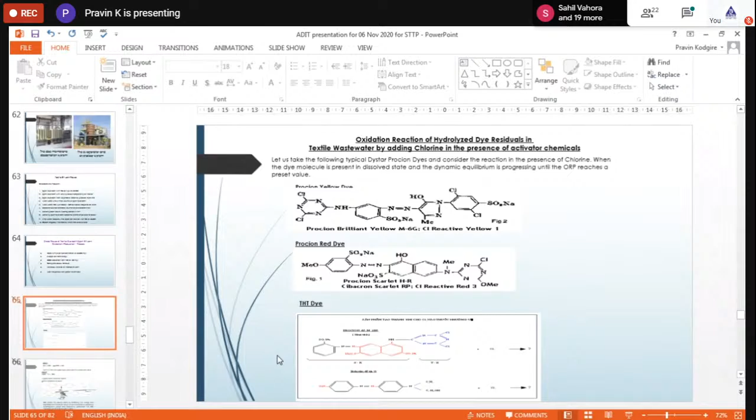So what they have adopted is a new advanced technique which I have not discussed, like carbon adsorption or filtration, but they adopted an oxidation reduction concept, and this is a very interesting one. Although the salt concentration is 40,000, by adopting this oxidation reduction process, they were able to get very good water quality, and you cannot imagine the waste can be of that quality. I'll show you some pictures that will give you an idea.

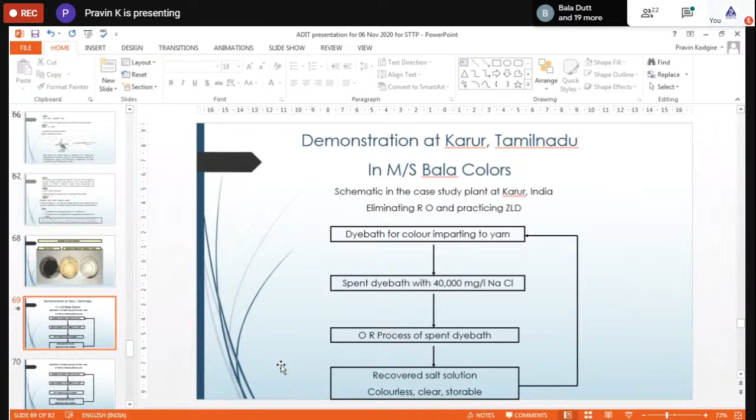So another is a demonstration of the oxidation plant. They have studied oxidation reduction treatment because they want to establish what treatment times and quantity they can do. So lab scale they have done.

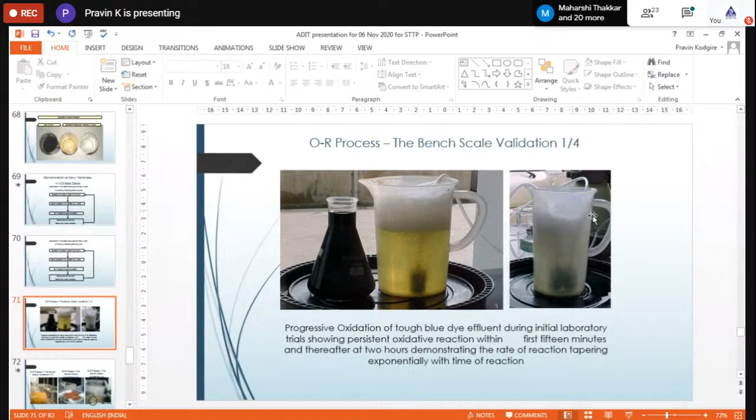So at first, the conical flask you see here is very dark in color. By using the redox method, you see the redox treatment is going on, and within 15 minutes the color has changed from black to light yellowish, and after 2 hours of treatment they got water as good as transparent.

So I'll just show some other schematics. They are implemented at industrial scale or pilot scale as well, as we have seen in the schematics. If you see there, bench-scale validation is done for the process, and after 1 to 2 hours of treatment, whatever water is sprinkled is very normal water that can be easily discarded, or if you want to reuse it in the system, it can be reused. That is the beauty of applying logic or smart approaches to wastewater treatment and management.

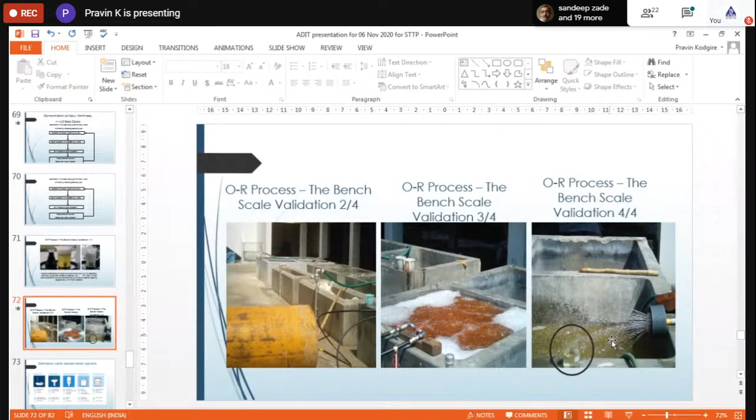As I discussed about waste strength reduction, waste volume reduction, and adopting a combination of different primary, secondary, and tertiary technologies, those things need to be utilized. Here is something I showed as a schematic of the different water activities we do on the domestic front, but there also waste minimization or wastewater management can be done.

For example, make use of newly designed water showers. Earlier you used 10 to 18 to 20 liter per minute showers; the new showers will reduce the water flow rate by half, but you will get the same effective bathing experience. Then, turn off the taps while brushing.

These are again a common practice, and even during school days, as part of the environmental science subject, we adopt these things. Otherwise we used to open the tap where 6 liters per minute of water just flowed, and that is fresh water, but being wasted, it has gone and increased the burden. It has to again pass through all the stages of wastewater treatment.

That can be avoided. For flushing toilets, use properly designed 2-button flush toilets or modules, which reduce the water flushed into the system by 3 times. These incremental steps in our daily activity will reduce waste generation. These are all source reduction methods, which will reduce the loading on the effluent treatment downstream.

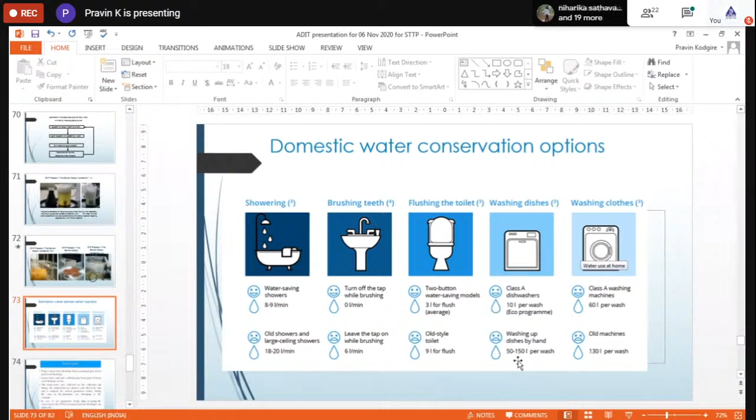Then there are certain other concepts which need to be adopted, and which we used to adopt when rural life was more prominent. But even in urban areas, the storm water we get through the monsoon can be collected and stored; a proper design is available and needs to be worked out. So those concepts need to be adopted.

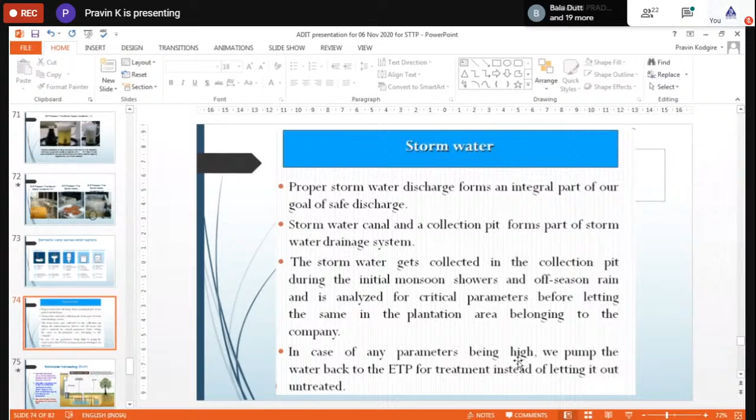Another concept is rainwater harvesting. Most rural areas have these concepts, with deep dug wells or big pits made, and the runoff water is collected and utilized. These concepts are more prevalent in domestic regions, but even industries these days are looking to go for rainwater harvesting.

The best advantage you achieve is this: another major problem we face because of urbanization is that we are making the surface impervious. We hear many times that if a flash rain happens, 6 inches, 1 foot or 2 feet of water, depending on the region, accumulates across city areas. That is precisely because we are making the land impervious for water to percolate into the subsoil. Water is not getting into the soil, so the groundwater level is not increasing, and groundwater availability is decreasing.

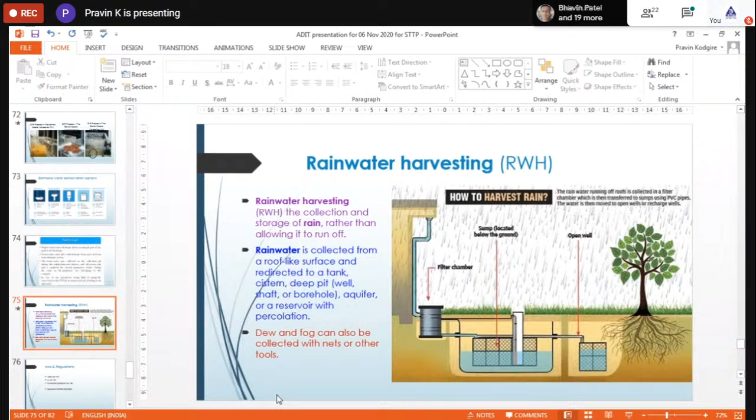Many times when it is not the monsoon season, this groundwater or available surface water is the major source for the rest of the year. So by adopting rainwater harvesting, we are encouraging an increase in groundwater levels, which are generally depleted because of the whimsical withdrawal of water we discussed at the beginning of the slides. So those new concepts and strategies are being adopted.

As fresh students or youngsters, you need to be aware of certain norms. I have highlighted a very few, which some of us are well aware of, but there are subsections and new modifications that keep coming.

You need to make a practice to visit the Ministry of Environment and Forestry website to see what amendments and new modifications are coming up in terms of domestic water and freshwater utilization, treatment of domestic wastewater, or new normal situations for industrial wastewaters. As I mentioned, ZLD concepts and new concepts for other rules and regulations will be helpful if we make a habit of visiting this website.

So in short, I have tried to summarize some of the aspects. I have not touched upon everything, but I'd like students to take notice of these points. Wastewater management is a need of ours, and some of what is to be done and what has been adopted, I have already shown you. As fresh water is getting more and more scarce, whatever water is available and getting discarded needs to be brought into recycle-use concepts in the system.

The water use efficiency I talked about in the beginning is important. Whatever water we are using, whether for drinking, urbanization, or industrial activities, needs to be adopted through process change, equipment modification, and source reduction or source modification methods. The water we are wasting can be utilized for irrigation through smart irrigation activities, which need to be adopted by farmers, and the farm community needs to be made aware.

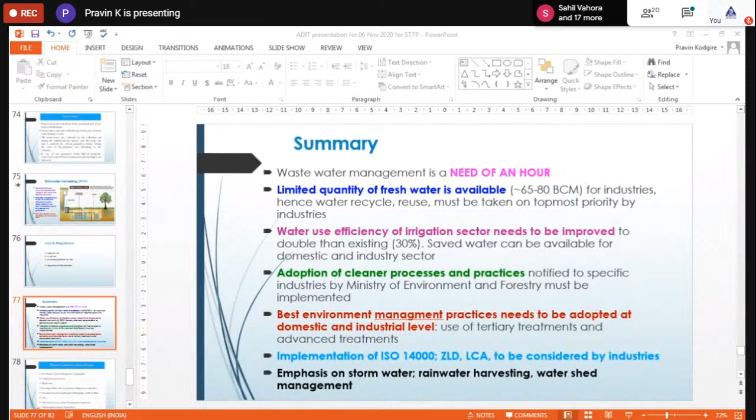Yes, any participant having any question? I'll stop sharing if needed, then I'll get back to specific slides so that it will be better for me to. Yeah, no issue, sir. Yeah. Yes, any participant having any kind of question?

Yes, anyone having any queries or question? Sir, I wanted to. Yeah. Yes, go ahead, Mahesh. Yes sir, I wanted to ask one question.

Sir, in Arab countries, they do filtration of sea water and use it as drinking water. That's why it's pretty costly over there. Is there any time soon that we see that kind of system happening over here? Because that we can convert, say, wastewater into drinking water and like that?

No, it is happening, that's what I said. That is the reason I talked about centralized and decentralized systems, because I gave you an example, typical like South Africa and all these things. So what is happening, don't forget about that. Even in the United States recently, Texas and those regions, they were having plenty of rainfall, but in the last 2 years there was hardly any rainfall, and even the actual water that was available on a regular basis was also consumed.